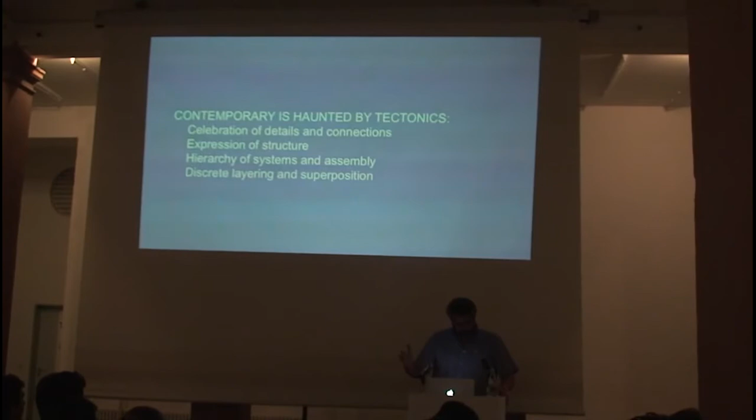So tectonics, which in Germany you understand better than in any other nation on earth, you celebrate details and you celebrate connections and you celebrate the mechanical attachment of parts. So it's not so much the surface that architects are interested in. The architects are interested where two surfaces come together. And that point of connection is usually where we locate our details and where we celebrate the details.

We also tend to want to celebrate structure in and of itself, where in composites, the structure is everywhere and nowhere. We like to have structure be expressed as a frame or a pattern or a grid. And we also like hierarchy of systems. So if you have a structural frame and a cladding and an interior, we like to celebrate the fact that those are disparate things, and we like to celebrate how they relate to each other intricately.

So that's what we do, and all of that is hostile to a real understanding of the principles that Bill just talked about. I mean, whoever asked that question is on the right track. I mean, in our lifetime, there will be a boat which is one monolithic, semi-flexible thing. There won't be a mast and a sail and a hull. It'll be just one big semi-flexible shape.

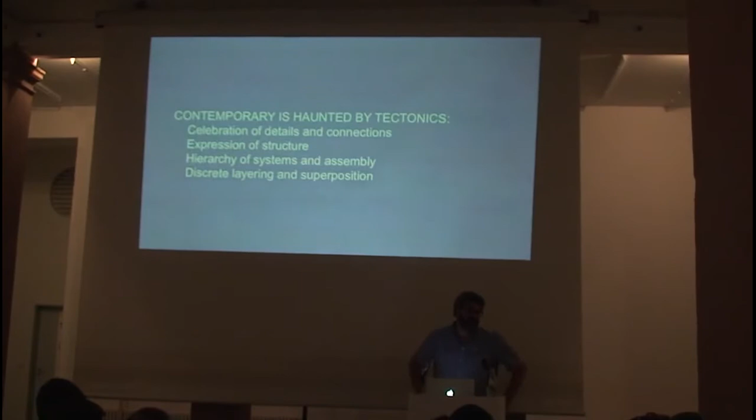So Bill and his people are on a mission to eliminate everything we love about architecture and make it microscopic and make it layered and pull it all together in a monolithic, intelligent way. So that's the program, I think.

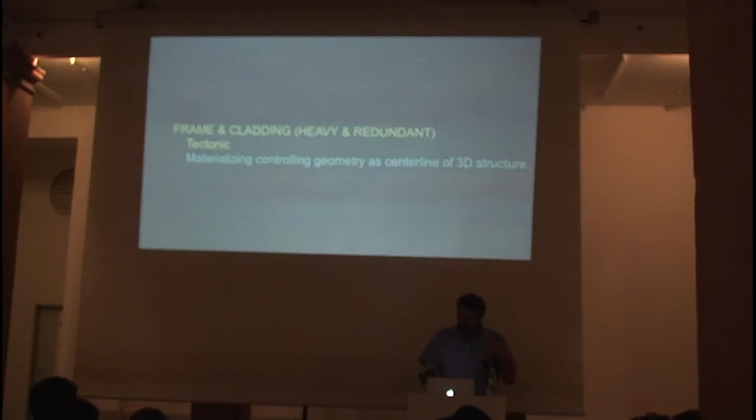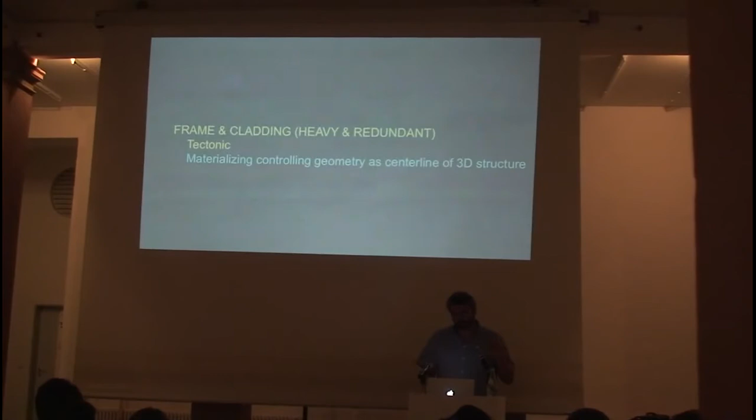So the one thing I would just warn you about is computer technology is letting us make more and more complex geometry, but when it comes to building it, we tend to try to celebrate that geometry. So we would put all of our structure on the lines of geometry, just in a finer, more technical way.

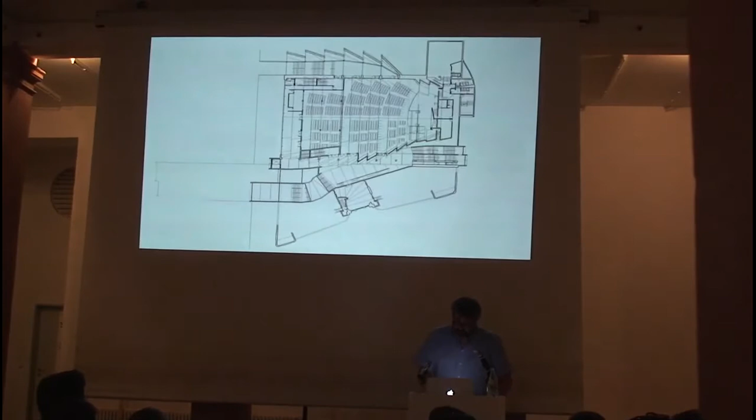So for me, Johan mentioned the church. I mean, this is a tectonic project. This is 15 or 18 years old, but you can see that the outer skin, the structure, the interior cladding, they're all hierarchical layers. They're very intricately connected. What I am proudest of is that this was a very digital project in the sense that every dimension and every panel was unique. It was all controlled and interrelated.

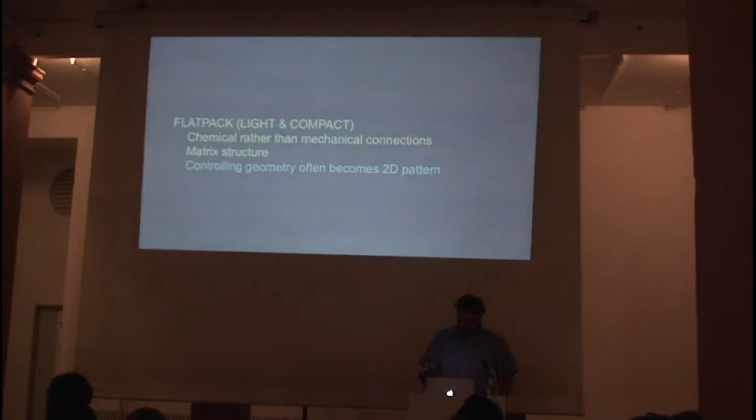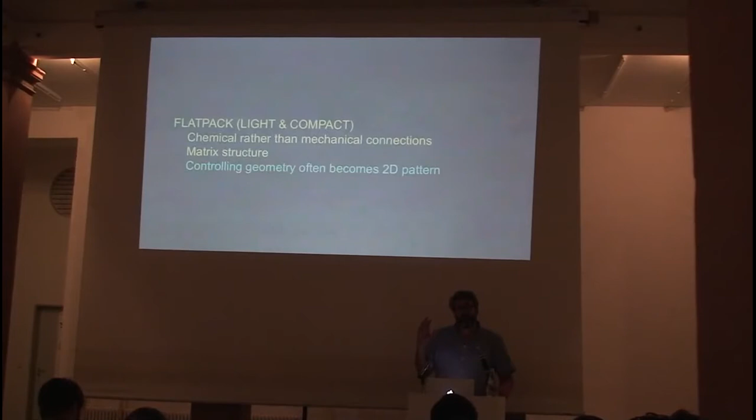It was very rhythmic in the sense that all of these different dimensions related one to another, but it was super tectonic. And it was really about celebrating structure and celebrating connections. And that's a thing that I'm not so driven by anymore. So what I thought I would do is bring some examples of just general composite work, but without the sensibility, and talk a little bit about those, and then end talking about some of the things that Bill and I have been doing together.

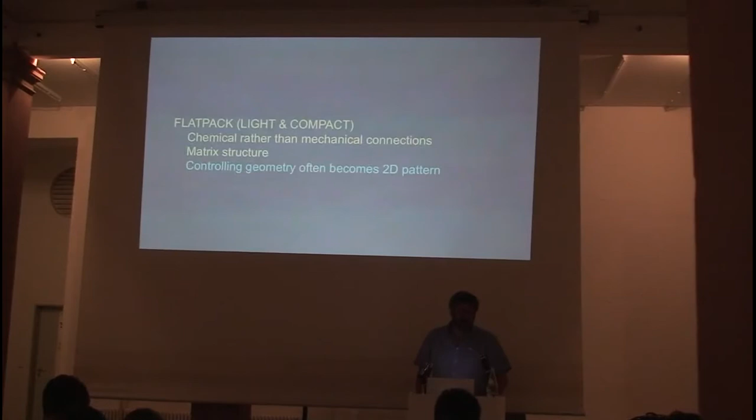The first principle of this kind of a composite construction is moving from mechanical connections to chemical connections. And I've always been impressed when somebody at BMW tells me that my car doors are glued to my car, that the bolts are just there for placement, but that actually the car is all glued together. And it's true, go look at your car, you'll find very few mechanical attachments. It's really held together with glue.

And also when you go on a construction site, everything's mechanically attached, and then all the people come with the glue and the silicone and the caulking, and there's a lot of glue in our industry too. So I've been trying to build things with no bolts, no nails, no screws, just all glue, or in this case, no glue at all.

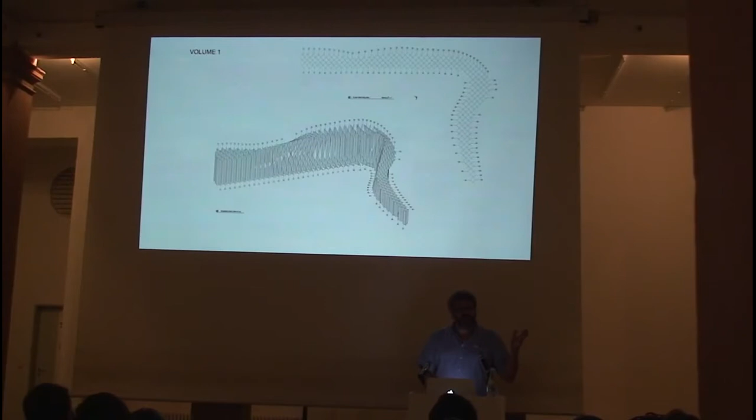This was at the same time that we did the carbon crystal sales. HSBC Bank asked me to do a pavilion for their collectors that could get shipped around easily. So we came up with this flat pack system where really in a day, 2 or 3 people could take things off of a van, not even a container, and put all of these elements together like a hex, like a grid, or like a core.

And then we would put the windows and the openings through it by just thinning that core down so you'd get holes in it. And we didn't even actually have to bolt it to the ground. So there's absolutely no connections there other than friction connections.

It led to the INDEX pavilions, which opened maybe 6 or 7 months ago in Copenhagen. It's the biggest design award in the world now, and they have 80 objects that they display, and the pavilions go around to over a dozen venues in a year. So these pavilions will travel maybe 30 to 50 times across an ocean.

And they came to me and they said, look, the budget for the pavilions is a couple €100,000, and they have to be holding this many objects. You don't go inside them. They have to be vandalism proof. They have to generate their own energy so we don't have to run electricity to them. And they have to fit in a maximum of 12 shipping containers.

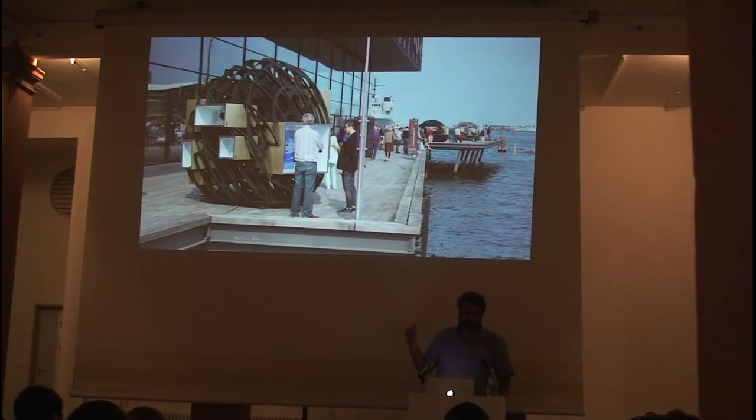And so we actually did an analysis of how sustainable it would be to build them all in plywood versus building them all in carbon reinforced plastic. And it turns out we were using so little material and the transportation was so bad, using so much petroleum and energy, that actually the carbon footprint of doing them in carbon was better than doing them in wood, better than plywood. So anyway, a lot of these materials Bill has talked about, they're super sustainable.

They're horrible as a material themselves, but you don't build a building that weighs thousands of tons out of them. You use hundreds of pounds. So anyway, if you look at the big picture, they get really interesting in this day and age with the concerns of architects and clients and culture.

Anyway, so these have already been, they split them up. They've been in over 10 cities already. I think, I don't know where Resor is, but 5 of them are in Resor right now, and then they'll go to Singapore. Anyway, and these also flat pack.

The reason they're compact is you take them apart, you stack them all up, and the boxes are composites in the sense they're 2 aluminum skins on a plastic core, and we just score through one side of them so you can fold them. And so even the vitrines unfold flat and get stacked, and then we fold them back together. And those, I have to say, have screws rather than Velcro. But everything else is completely non-mechanically connected. The boxes actually stabilize the grid.

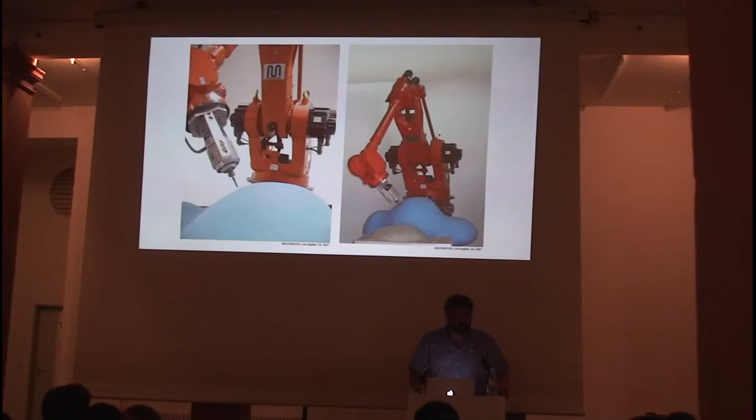We actually built the tool in my office, molded it in plastic, and then this is the robot of a company called Machineous, which is a specialty fabricator in Los Angeles. And we would take each one of those bricks and find their intersection, where this one intersects that one, for instance, and we would cut away a hole in one brick, then leave the rest of it whole.

And then in a very labor-intensive way, you stack all these things together and they interlock, and then you weld them together with heat, so they become one monolithic surface. So, and we've done, I don't know, maybe close to a dozen of these for interiors. SCI-Arc asked me to do one as an exterior, and for a shape, I just made a giant version of the brick shape.

We did realize that you need a jig as you get something this big, because you can imagine 30 or 40 students with all these numbered bricks starting at a different area and stacking them up and welding them, that when they came to meet, there was a lot of inaccuracy. So at this scale, the intricacy of the components really starts to need a new method of precision and control. But you can see there's some pretty significant cantilevers and everything in this thing.

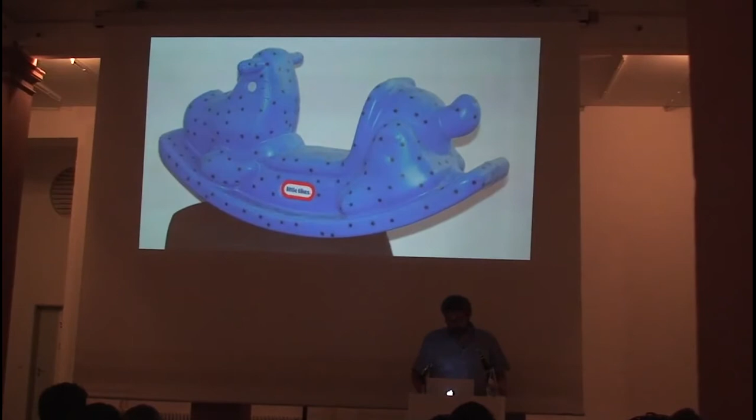Then Aaron Betsky, who was the director of the Venice Biennale, asked me to bring this pavilion to Venice, but then his Dutch graphic designers did a blob wall signage scheme. Honestly, they did lights out of these pixels, which were three-dimensional blob wall bricks. And Aaron said I couldn't bring it, I had to do something new. And he said, well, why don't you do the toys? So I went back to the toys and came up with these furniture pieces.

So you can see each one of these toys gets points and covered in baby powder and scanned into a digital model. And then those digital models are arrayed in configurations on the computer, and we find their points of intersection, like with the bricks, and cut them, and then assemble them.

We did a duck table, which were German ducks. Every country has a toy that's important to them. The Germans made the ducks. The Italians did the eggplants. These are by an Italian company. These are an American company. They're whales and dogs. And during this time, my wife kept saying, these should be fountains. And I didn't understand why she kept saying they should be fountains.

And then we were in Rome together with her Bernini scholar parents and looking at Triton's fountain, and I realized why. It's because a fountain is typically an assembly of disparate figures, where a sculpture might be two figures on a plinth. The fountain here was, I believe, 4 turtles with 4 dolphins, and each pair of dolphins holds a key, and then on that key are 4 shells, and then on the shells is Triton, and then Triton's drinking from another shell. So there's like 9 or 10 figures all piled up into one mega figure.

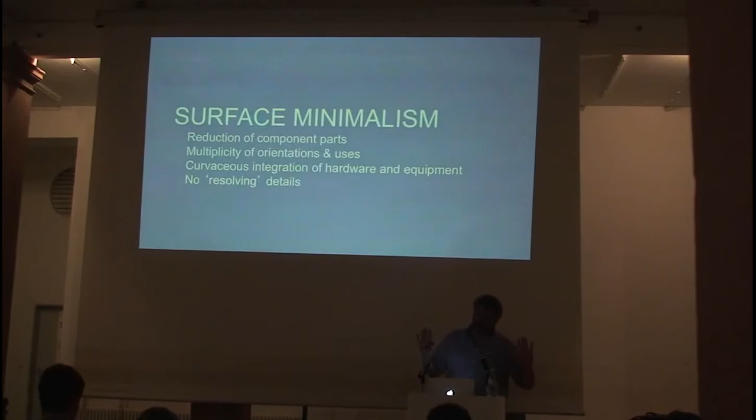And it came out of working with Alessi and Vitra that I developed this idea. Because you can imagine, if you go to Vitra and say, I have a new idea about a chair. I have this amazing parametric computational power. We noticed most of your chairs are built with 15 parts. Now I can design a chair that could be made out of 15,000 parts, and every one of those 15,000 parts intelligently knows where the other 14,999 are. That'll be a very short meeting, because they don't think that's innovation. If you go to Vitra and say, your chairs are made with 15 parts, I can do everything your chairs do in one part, then you'll take over the furniture industry.

So there's an energy now in architecture to try to make things complicated because we can make things complicated. And I think in manufacturing, there's not a lot of interest in achieving complexity for the sake of complexity. So when I did this tea set for Alessi, the only instructions I got, other than a history of success and failure, which Alberto takes everybody through, was he said, it has to hold hot water or hot liquid, and it has to have handles, because architects never put handles on their coffee sets, and the only thing I ask you to do is make handles.

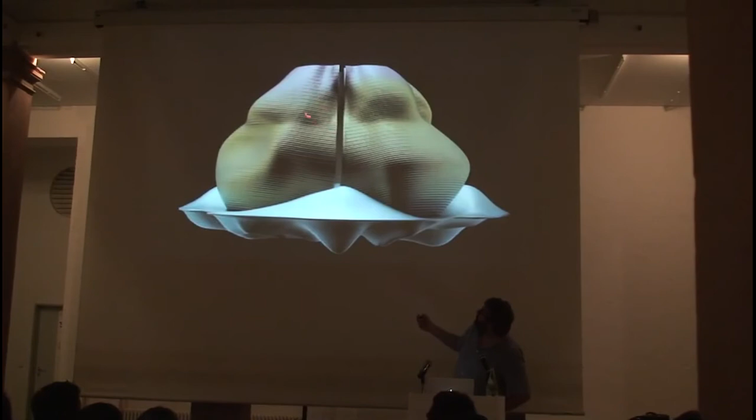So the way this works is there's a vessel inside, and then there's a skin on the outside, and the skin is textured by capturing the tool path of the graphite mold, and the two things are bonded together with glue, with silicone. So you can grab it anywhere and you don't burn your hand. And all the handles become part of the surface, and the volume is all held in the flask. So the entire pot is done in 4 pieces of metal. And all the information is put into those 4 pieces of metal.

And I was asked then to do the tray. I forgot to do the tray. And the tray we did with one top surface, which captures the vessels. They all sit neatly in it. And then the bottom surface, you can flip over, and it has all the corresponding curves of this. So you can then turn the tray over and lay the pots down, and they open up like a flower. So six surfaces were used to make the entire thing.

We commercialized that with these ceramic cups, which is all handle. So you can grab it anywhere because it's hollow, but you don't have to put a mechanical handle onto the cup. With Vitra, the ravioli chair is the same idea. There's more than 2 surfaces here. There's 3 different kinds of foam molded into the arms and the seat and everything, but it's one soft surface and one hard surface. So instead of legs and attachments and all these things, it just gets integrated into the ergonomics of the curves.

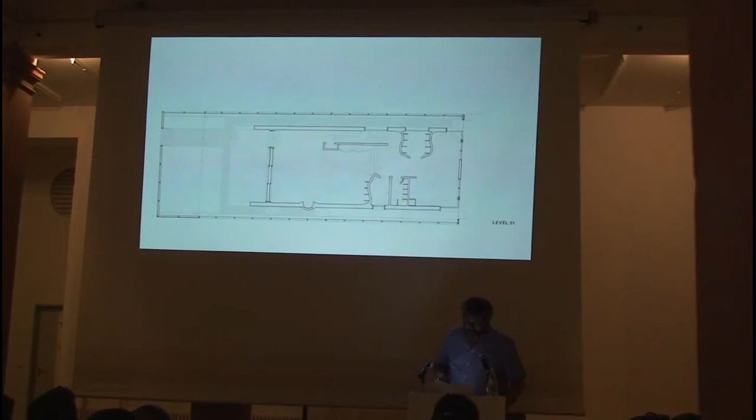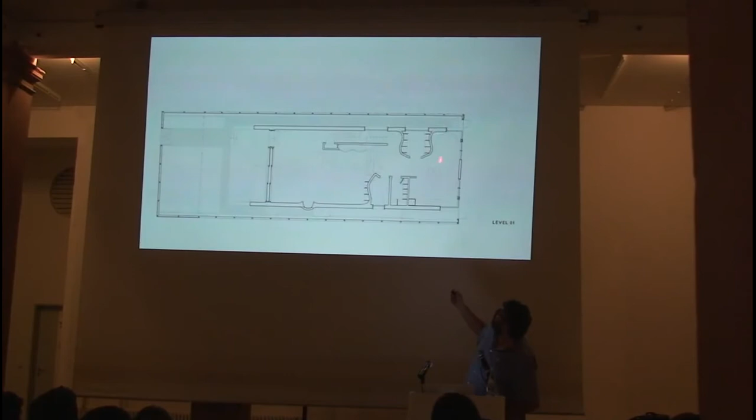And so when I started the design of the Bloom House, which is in Southern California, I thought, like Asplund, I would try to take the logic of that Vitra chair and build all the interior surfaces to absorb all the equipment from the house. So in plan, you can see the hearth, the powder room, this home office, the breakfast nook. It all gets absorbed into the walls of the house.

And the same thing with the section. It's a loft. I mean, it's really a one-room living space, but I tried to make that living space very cozy or heimlich by deforming the walls and deforming the ceiling. So this is a big, it's a little bit smaller than my boat, but it's pretty much a boat-size hull that's bonded to the ceiling as a giant light fixture that also kind of brings the scale of the room down.

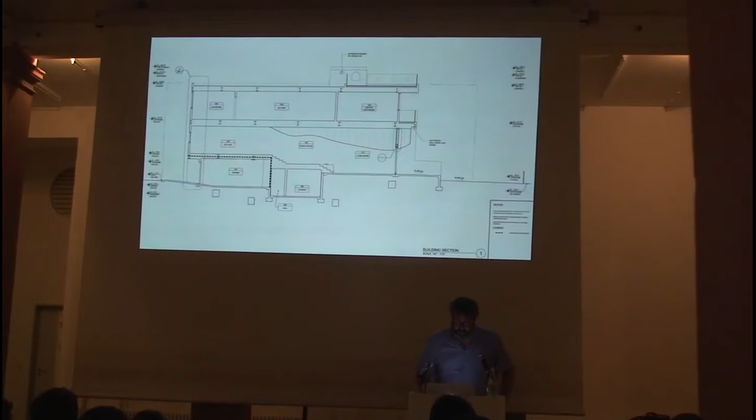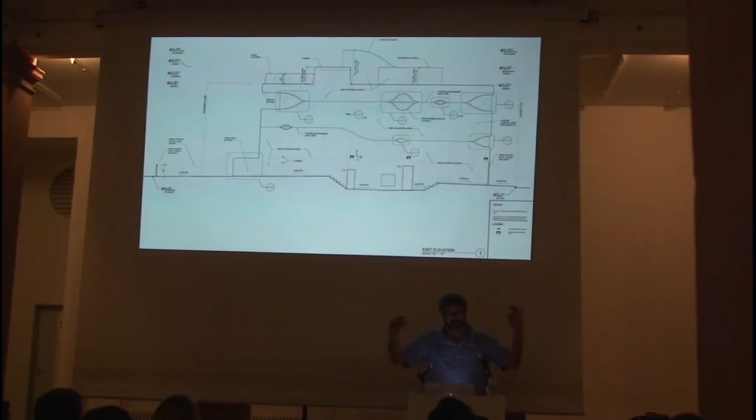And then the windows are all, these are stock windows. They're called cathedral windows. Like if you imagine a rectangular base on this, that's a typical detail. We just flip the head down as a sill. And so the windows also pinch together along the facade. So here's some photos of that.

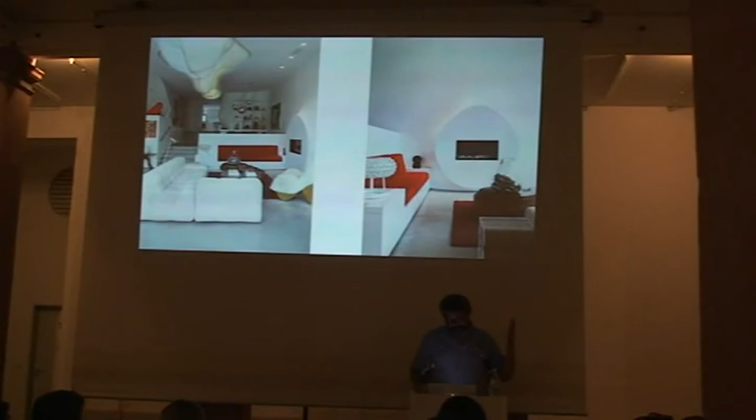The other thing is the laser cutter we used was almost 30 years old. So it wasn't like a new technology, it was just nobody ever came to the laser cutter with a file. They'd been laser cutting stuff forever. It was just the contractors that would go talk to the laser cutter. They never had an architect come and say, you know, we want to cut all this stuff. So anyway, it was totally old school. You could have done this exact same project at least 25 years ago, and we wouldn't have had to pull a plasterer out of retirement.

And a lot of the furniture was also made in Corian, like this breakfast nook. The bathrooms, like the sinks are stock, but the cabinets for the towels and the toothbrushes and everything and the whole cabinet here, they're all pulled out of the walls and molded. Okay.

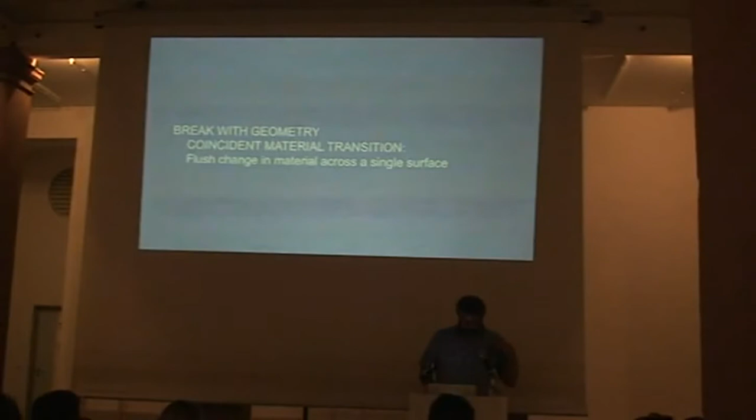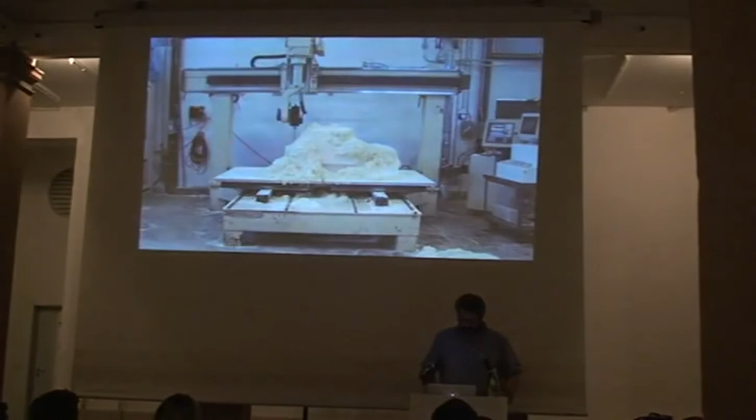The question about could you do two different materials in the same head, I think that's maybe not the question. The question is, can you do multiple materials on the same mold? This is a lantern we did with Bill Kreysler, where we have to make the mold. And then on that mold, we scribed the material transition between concrete and chopped fiber composite. And then we specially cut these wavy stainless steel rings to fit that surface.

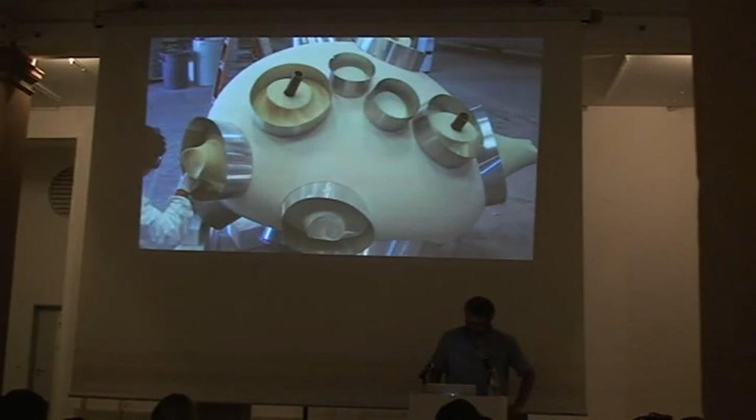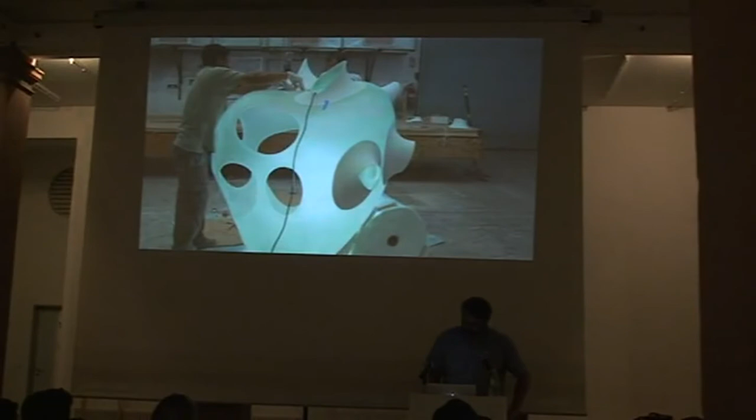And then they laid up all the fiber reinforced concrete first, and then popped those off, and then laid up all the translucent chopped fiber, and then glued it all together into one final thing. And for me, this experiment in multiple materials on the same mold, this is some jewelry that uses the exact same logic of different materials on the same monolithic surface. This is for Swarovski.

This is a museum in Santa Fe that does an aggressive renovation of its facade every 3 years for a major show it does. And we did these elements. It'll get repainted in a couple years, but these elements will stay for as long as they want them. On the exterior, we took all the doors and windows and made these composite scoops that cover them. These are models of how those elements work. And then 4 of the scoops that are on the inside travel with the show to different venues.

And part of the reason about this is I'm really burned out on building something for some special use that's temporary and then throwing it in a dumpster. So for these, we tried to use a material that was durable enough that it could be outdoors, but also that it could be reused. So it'll be used by 3 different museums, and then when they're all done with these 4, they go to a ranch in Texas, and we put them together into a little picnic place in the desert.

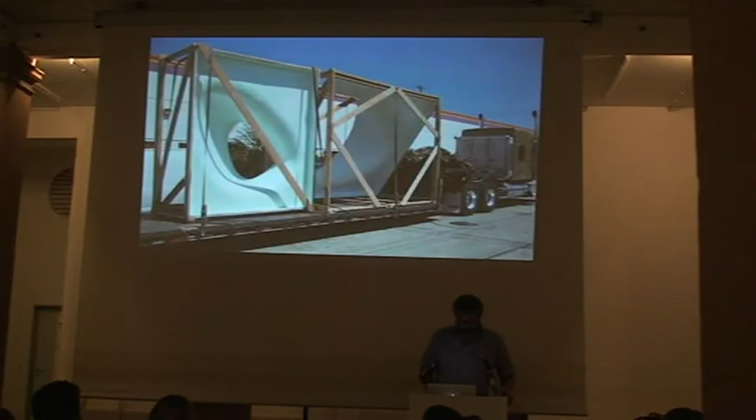And I think we designed and built these in a little over 5 weeks. So it's the other nice thing about composites, it can be quick if you design them for who's going to build it. Bill's already talked a lot about load path, but I think what's important for everybody here to think about is that load path kills the geometry of your form. Like Bill's designers give Bill a shape.

Because of the finite element analysis he does, the actual structural frame of those millions of fibers doesn't follow the geometry of the shape. It follows the loads of the structure. So for the Swarovski sails, we used an existing sail shape because we knew we could mold it, and played a little bit with where the fiber placement would be.

So they would give us A2 sheets of crystals, and we could also play with the colors of those crystals. I think we used 5 different colors in these different gradients that would move across the surface. And it worked. The frames are rolled aluminum tubes with carbon bonded onto them in different layers to stiffen them up.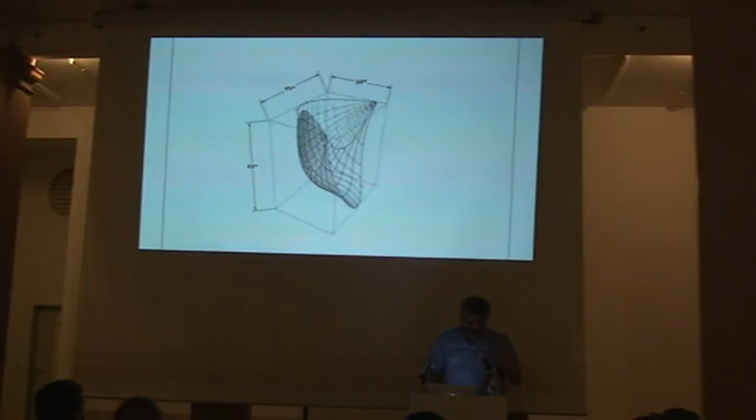Okay, that led to this chair we did for the Art Institute. For me, what's a revelation about the chair is that I've always hated tensile structures, but I've always had to work with tensile engineers. The Korean Presbyterian Church was engineered by a tensile structural engineer because of the complexity. And the engineer was always trying to tell us to make things in a fabric shape, but when you use a fabric, the fabric can only have one form, and that's whatever its hanging form is.

So the same thing, if you use that kind of a structural engineer, they're always going to want to make everything into domes, which are like catenoidal domes, the optimum load shape. What's nice about Bill, which I realized, is he doesn't care so much about the shape as long as his mold can shape it. He's not always saying there's an optimal shape or we're form finding or there's an ideal shape. All he does is put more structure where you need more structure, and you can get any shape you want.

So for the hanging chair, we built this mold, which was really about the ergonomic comfort of a hanging chair. So this inflection point, we built into the shape of the chair, same as this inflection point. If you look at a hanging thing, it's just always sad. It's always hanging. Whereas this has got an inflection to it, which just gives it more visual activity. Also, these steep pulls you could never get in a fabric. You would get a thing that goes flat, then curves in the middle and goes flat again.

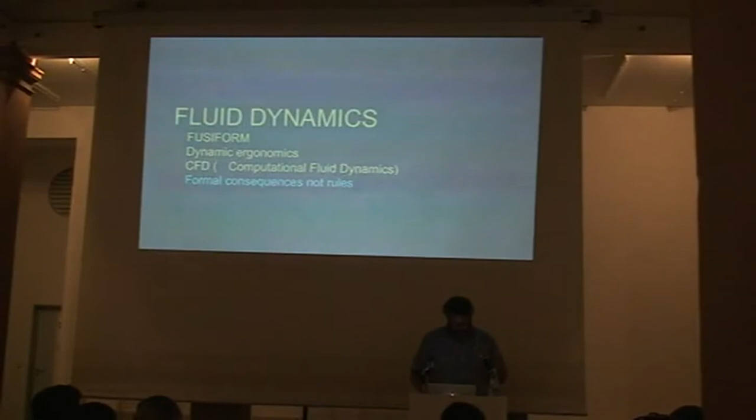Okay, now the crazy part, which is, this was all leading to me wanting to design a boat for myself, I guess, but I didn't know. But in the last year, maybe year and a half, I've been designing a trimaran with a naval architect who now I kind of have adopted. He's working in my office and working on this project super intensely and pulling in a lot of resources.

This, and I don't know, Bill, if Fred has shown you this, but this is a computational fluid dynamic simulation of the boat we're designing with air and water interacting at the same time. And we've been told by the company that does this that nobody's ever looked at air and water interacting. Usually the naval architect will do the hull form. They'll have all the data of its dynamics, and all the dynamics get loaded and looked at with the sails, and they go back and forth. But this, we actually just put the boat in the water and let it go.

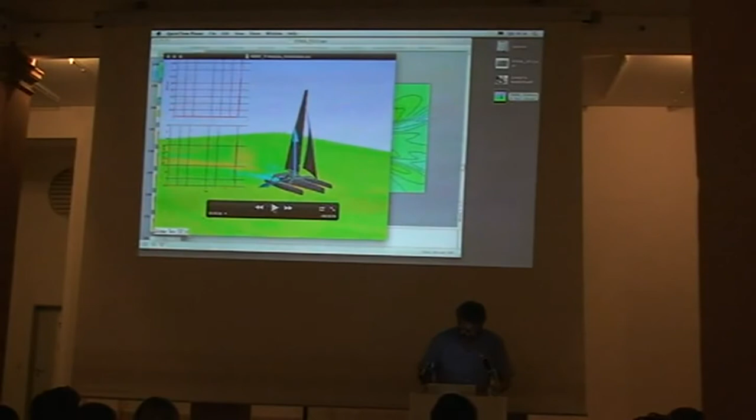And maybe I'll show you the avalanche of catastrophes that happened. This one, where it has boards that help lift it so it flies a little bit out of the water. And where you put the boards is one of the things that this is really good at. And you can see here the boards were too far forward. So the boat just kind of wheelied up and then slammed down.

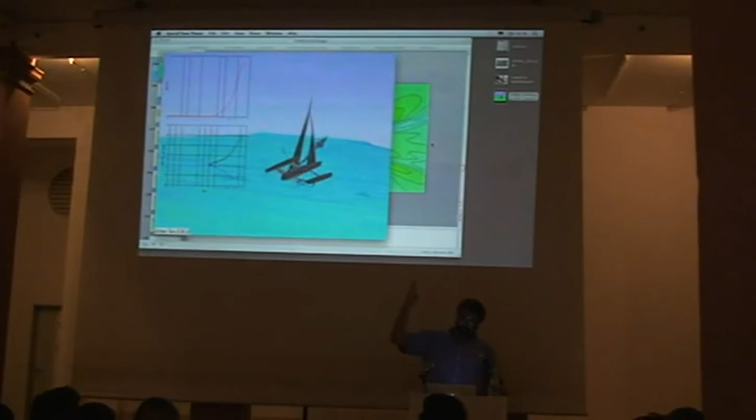But every single run always ended in some catastrophe, because it was like you put a boat in the water with no driver and just let it go. And it always found bad things to have happen. But as we would run them, what Bill calls the design space, meaning the limits between height and placement of the rig, placement of the foils, shape of the hull, all of that started to converge more and more and answer certain fundamental questions.

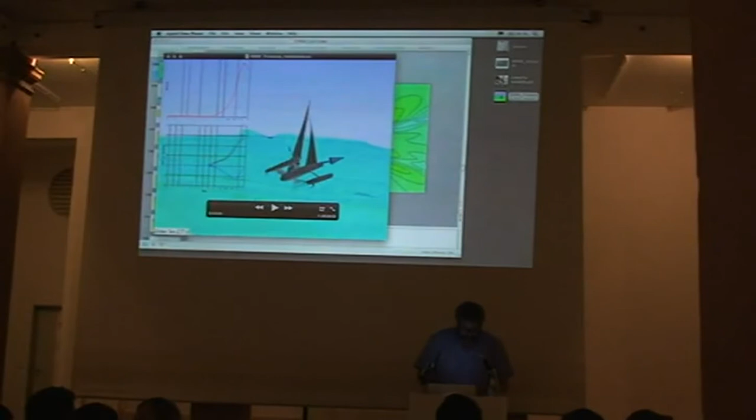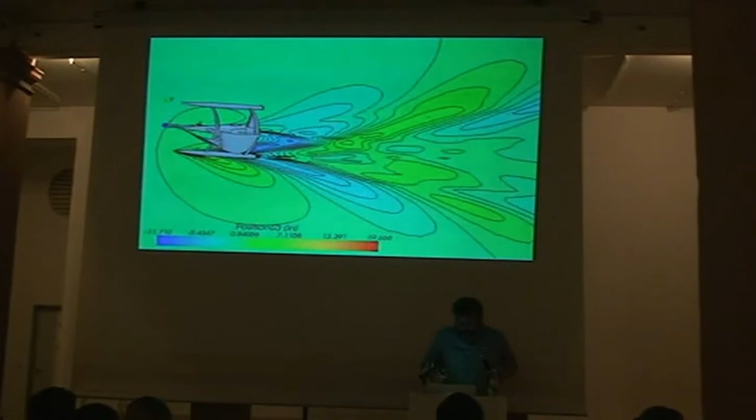And the thing is, it was like the old days in the sense that that simulation took 60 computers between 5 and 7 days to calculate. So it was like when I used to do a rendering in the 80s and we would send a thing and go home and hope it worked on the weekend. This was the same thing, only it was 60 computers working endlessly. So this computational fluid dynamics software is not interactive. I mean, some versions of it are interactive, but it's very intensive.

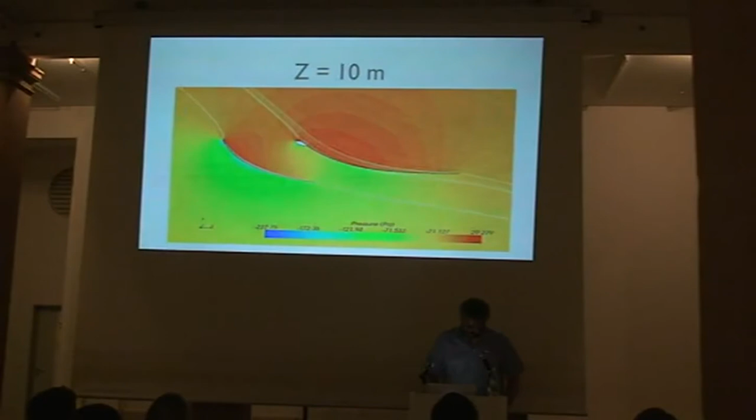So what you do is, instead of having your CFD window open while you model, which is what we would all like, you get data back that tells you where surfaces are under pressure, like with pressure maps, or it'll give you streamlines and tell you where you're getting turbulence and vortices. And so based on that information, like this, I apologize, Bill, I know this is embarrassing, but hopefully only you know how embarrassing it is.

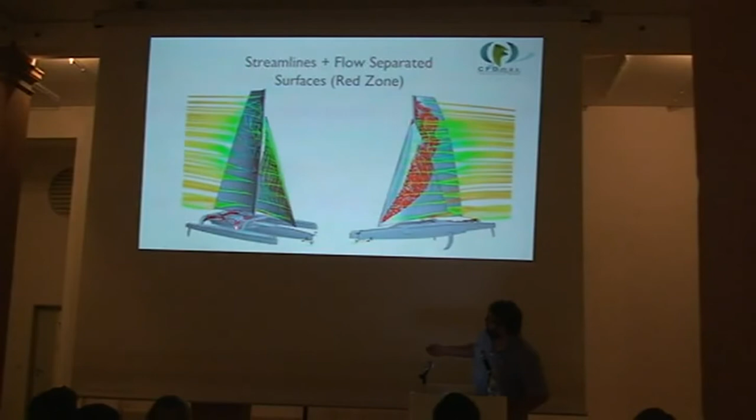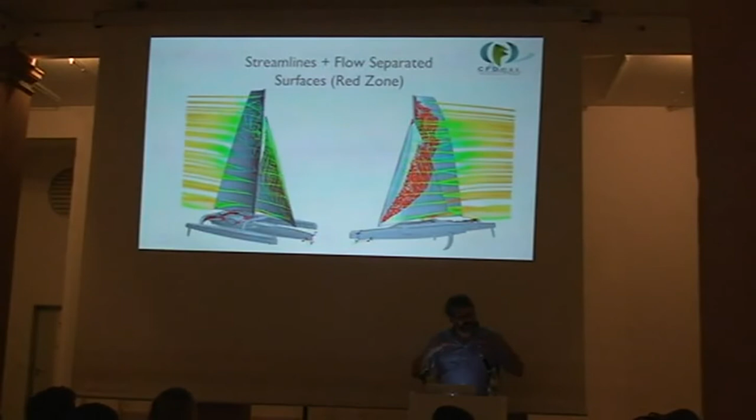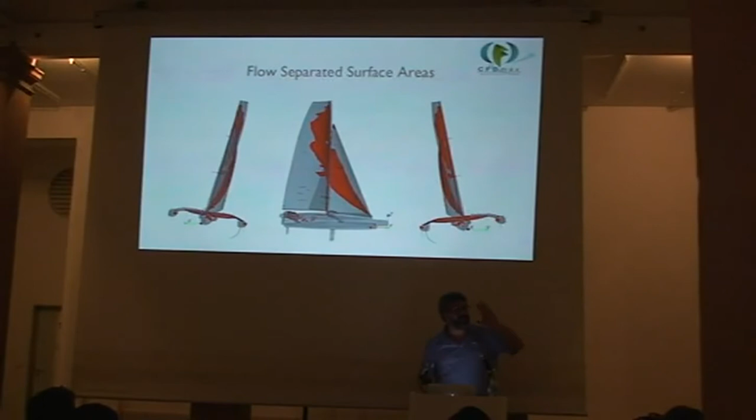But all of this stuff, the red, which is where wind was either shearing off surfaces in a way that it was rolling around and pulling, or where wind was slamming against the surface and we needed to put an angle there, all of the shapes were informed, I would say, over about 6 months with this kind of information. And so all of this is me starting with a basic topology and trying to clean it up, and then coming up with ideas and running it through a model and working with a naval architect and going back and forth. It wasn't like sending something into a box and having the box give you the ideal form. So anyway, all along the way, I was modeling to this kind of information.

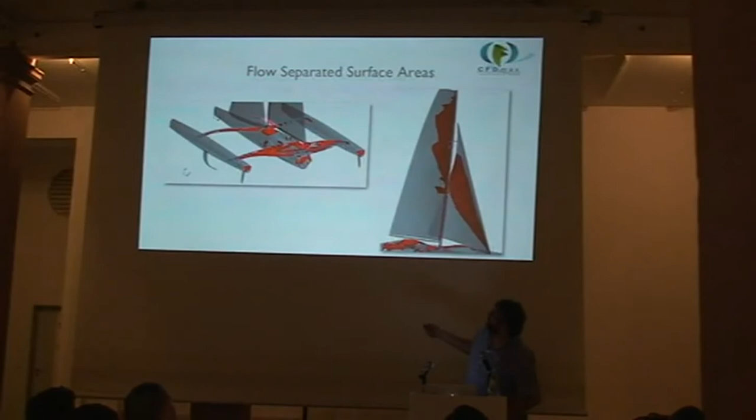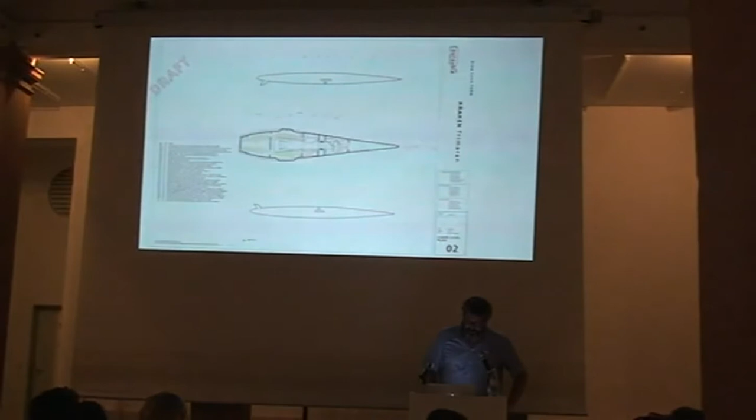And these are just some of the, this is kind of the styling and the surfacing of it. All the people in the boat industry think it looks like a plane, not so much like a boat. The interiors of it, we decided to actually build in my office to get some working knowledge of how composites work. And the design of it is really different than most things because it's moving. And the fact that this will be at maybe a 15-degree angle, and sometimes you might be sitting on the wall or needing to hold on to things.

And I was consulting with a boat company who told me when Philippe Starck did their boats in the late 80s, he asked them to put a boat in his backyard for the summer because he never had been on a boat. So they put a boat in his garden and they brought it in and they set it up, and he said, well, why is it straight up and down? And they said, well, that's how we store boats. And he said, well, put it at the angle that it sails at.

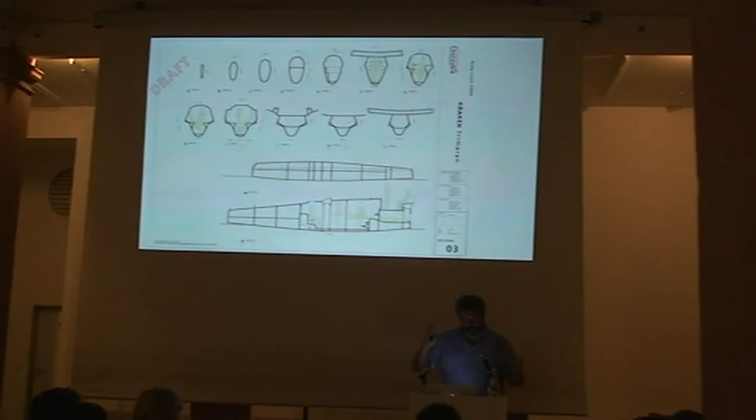And so they put it at a 15-degree angle, and then he slept in it for the summer at an angle. And I thought that kind of intelligence is really something interesting, that you really think about this thing not as a stable ground, but as a thing you live on the walls of. The reason I say that is I'm just starting a lab with UCLA that's all about moving buildings, and it's all about interiors that roll around and living on surfaces rather than standing on floors.

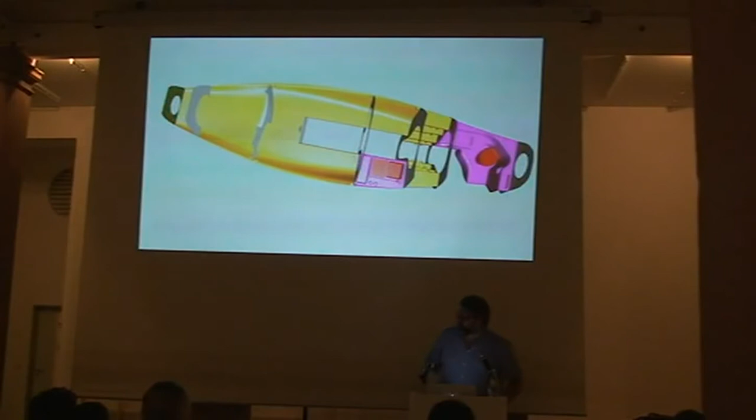So anyway, those interior elements, we're really trying to play with the fabrics. So the inside of the boat will all be just clear-coated fabric of carbon with some patches of Dyneema. And then all these elements we're building, like a king-size bed and 2 couches and a little kitchen and a head toilet. So because this guy Fred is in the office, the naval architect, it's all about weight. So every one of these things we make, this was the first thing we made, and we made it in a day. And now one guy is making 2 of these a day. It is so easy to do.

Like the people Bill was talking to today, you should take your glue guns and your wood sticks and throw them away and make some foam molds and start laying things up yourselves, just like in your models. It's super easy. So we cut a foam mold and coat it. Then you just lay the cloth in, you put a foam core in, put it in a little vacuum bag, and this is not cooked, so you don't have to build an oven for it.

And you can see this is a shelf that we engineered to hold 300 pounds, and you can see it weighs like 9 ounces, 10 ounces, something like that, and it takes like a morning to make. So the whole inside of the boat is going to be less than 100 pounds, like a one-bedroom apartment that weighs 100 pounds. So, thanks.

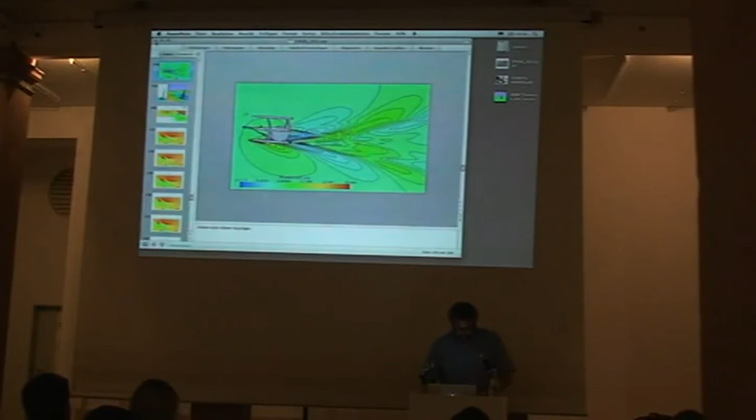Sure. How do I teach? Form. No, it's a good question. Well, at the Angewandte, which is the best teaching setup I've got, because it's very much like the Staedel, only longer. I mean, historically, the students study with me for 5 years. And so what we'll do is each semester, I'll give them one architectural idea. Like this term, we just finished floors. So everything they did had to be shaped formally by changes in floor.

So first we went on a trip. We went to look at libraries. So we went to Berlin, looked at Scharoun. We've been to Vyborg in northern Russia to look at Aalto's library. But we looked at historical precedent and paid special attention to how they were modifying floors. We also went to Stockholm and saw Asplund's library and the Woodland Crematorium. So we focus on precedent. We really hone in on one idea like that, and then try to spend 12 or 15 weeks to become expert in that one technique.